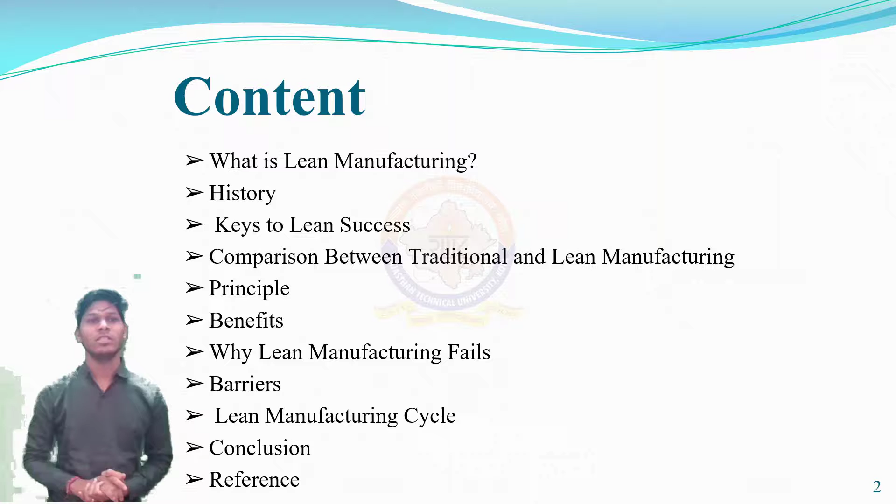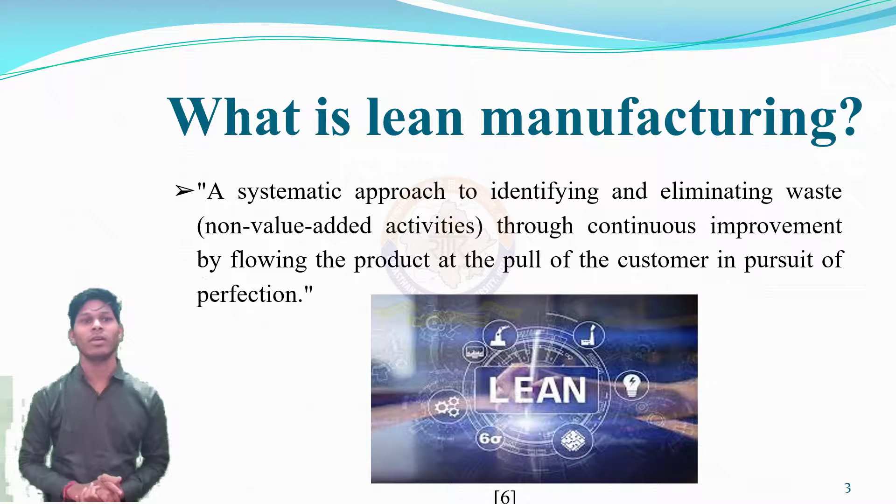Now, what is lean manufacturing? Lean manufacturing is a production process based on an ideology of maximizing productivity while simultaneously minimizing waste within a manufacturing operation. The lean principle sees waste as anything that doesn't add value, a systematic approach to identifying and eliminating waste through continuous improvement by flowing the product at the pull of the customer in pursuit of perfection.

Now we will discuss the history of lean manufacturing. The first person who integrated the concept of lean in the manufacturing system was Henry Ford. Lean was first born in USA. Ford production system was established in 1913.

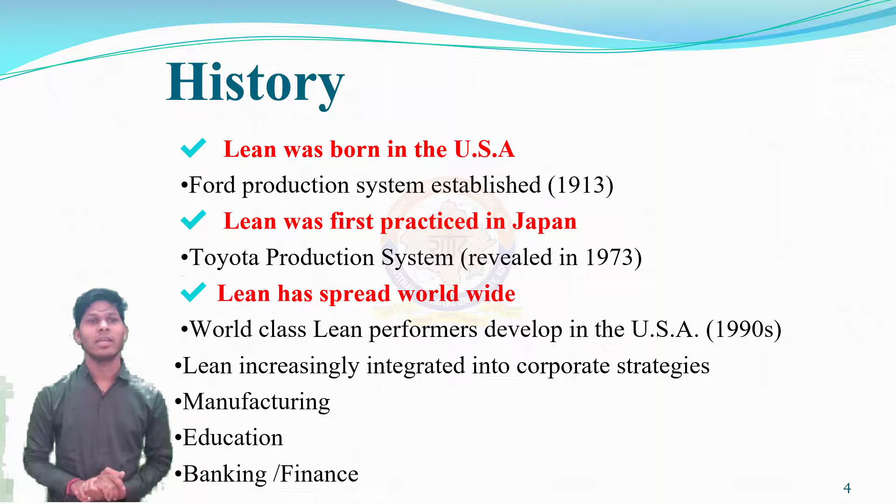When we talk about lean, the first name that strikes our mind is Toyota. Lean was first practiced in Japan. Toyota production system was revealed in 1973. Lean has spread worldwide; world-class lean performers developed in the USA in the 1990s. Lean is increasingly integrated into corporate strategies, manufacturing, education, banking, finance, etc.

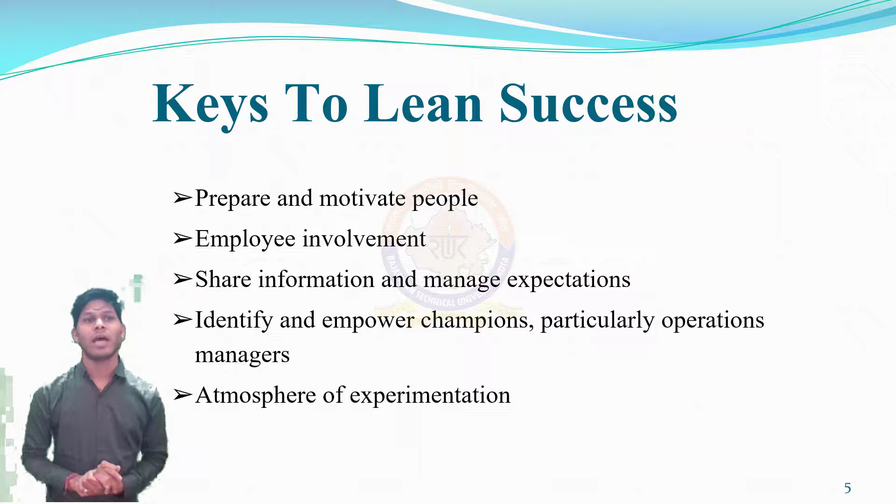Now, next slide is key to lean success. First, prepare and motivate people. Second, employee involvement. Third, share information and manage expectations. Identify and empower champions, particularly operation managers. Atmosphere of experimentation. Now we will discuss comparison between traditional and lean manufacturing.

A key difference in lean manufacturing is that it is based on the concept that production can and should be driven by real customer demand. In traditional production, it is driven by a sales forecast. For years, manufacturers have created products in anticipation of having a market for them. Operations have traditionally been driven by sales forecast and firms tended to stockpile inventories in case they were needed. Lean organizations are capable of producing high quality products economically in lower volumes and bringing them to market faster than mass producers.

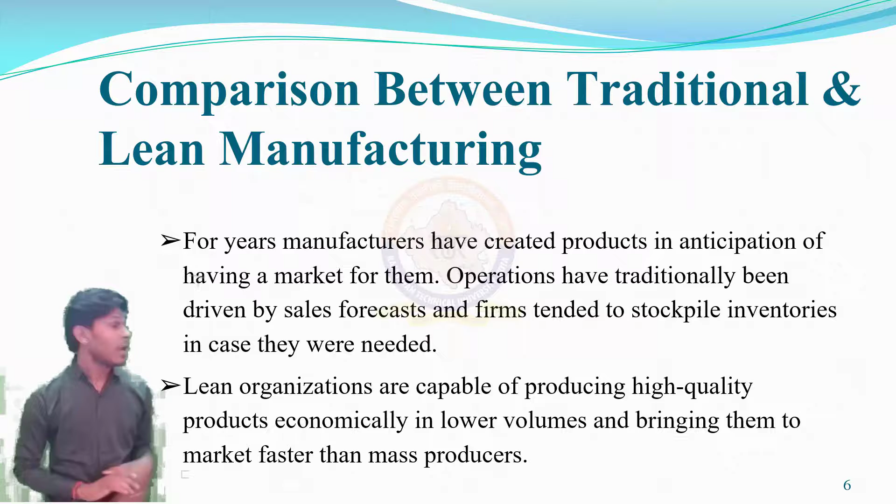Now I talk about principles of lean. Define value, map the value stream, create flow, establish pull, pursue perfection.

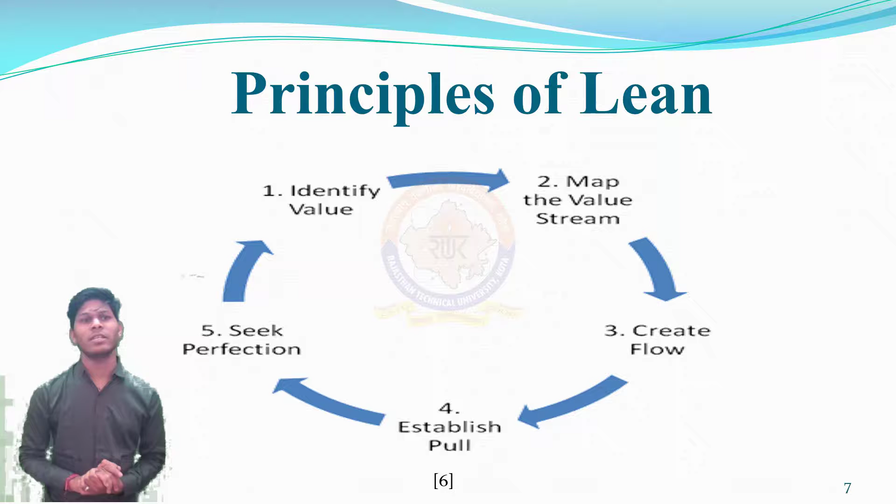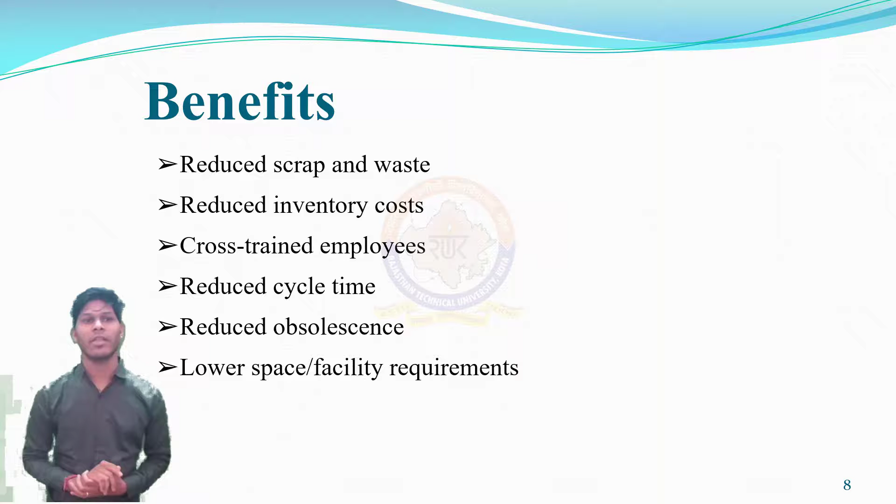Benefits of lean manufacturing: reduce scrap and waste, reduce inventory costs, cross-train employees, reduce cycle time, reduce obsolescence, lower space and facility requirements, high quality and reliability, lower overall costs, self-directed work teams, lead time reduction, fast market response, longer machine life.

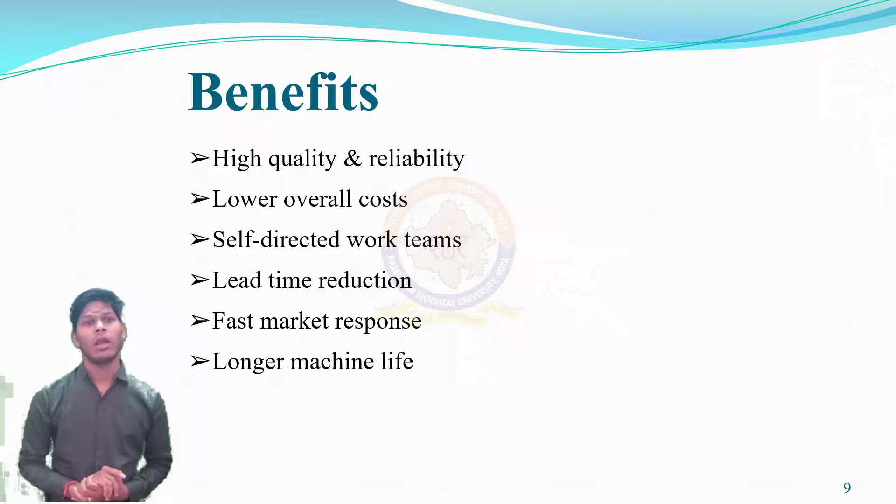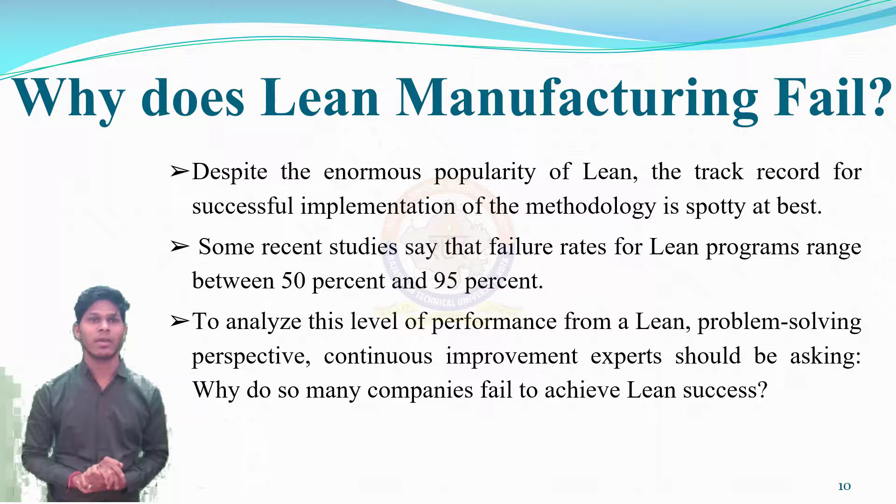Why does lean manufacturing fail? The most common reason why lean fails is because a manufacturer chooses to quit and return to the comforts of past methods rather than persist through hardship and roadblocks. Despite the enormous popularity of lean, the track record for successful implementation of the methodology is spotty at best. Some recent studies say that failure rates for lean programs range between 50% and 95%. To analyze this level of performance from a lean problem-solving perspective, continuous improvement experts should be asking, why do so many companies fail to achieve lean success?

Barriers of lean manufacturing: first, lack of resources. Second, lack of expertise. Initial high cost, which includes the cost of resources as well as expertise. Poor supply chain structure. Ineffective training and development of workforce in the company. Absence of continuous assessment of every individual in the organization. Psychological factors such as fear of losing the job on account of its implementation.

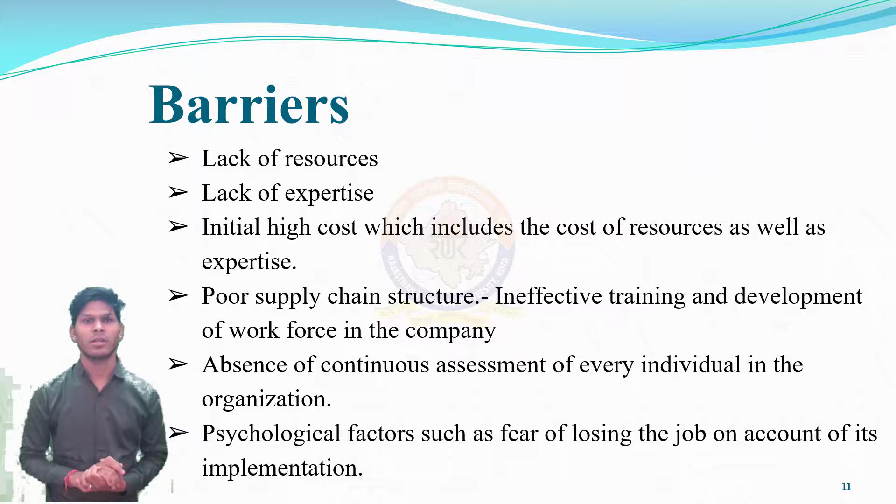Here we talk about 7 wastes of lean manufacturing. First, motion. Motion wastage is any movement made that could have been used for another purpose. Next, inventory - this is the waste that is associated with unprocessed inventory. This includes the waste capital tied up in excess stock, and wasted transport used to move the inventory.

Waiting - this is any form of waiting that must be done by either staff or machinery to complete tasks. Defects - defects refer to a product not meeting the specification expected by the customer.

Overproduction. Overproduction is the most obvious form of manufacturing waste. Not only does it lead to depleted raw material, but also to wasted storage and excess capital tied up in unused products.

Transportation is the process of moving something from one place to another. Transportation itself does not add any value to the customer. Overprocessing - lean manufacturing relies on products delivering value to the customer, but not over-engineering any product. Any work that doesn't need to be done, shouldn't be done.

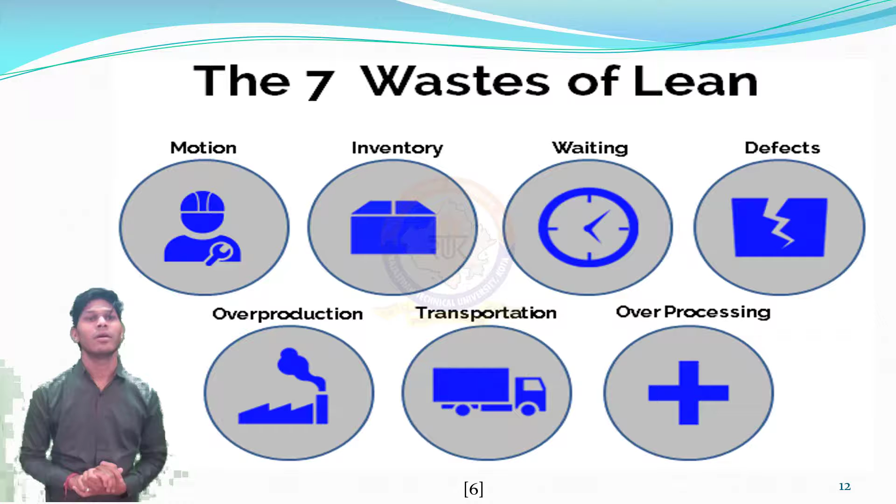Now, the lean manufacturing cycle. This is often held to be the most difficult aspect of lean management. It is typically explained as a 4-step process.

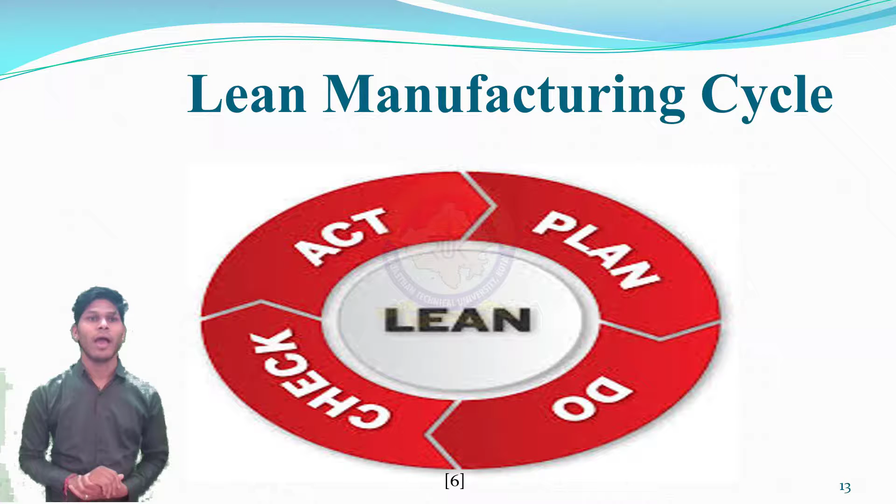First, plan - make a plan for an improvement in a process or the elimination of waste. Do - carry out the plan on a test basis. Check - monitor the result on a quantitative basis if possible; this step is sometimes called study. Act - implement or reject the plan based on the results.

One of the most famous instances in which lean production has been implemented successfully was the luxury car manufacturer Jaguar. Jaguar was faced with the need to compete globally while retaining quality control and driving down costs. By creating a lean production strategy with consultants, the firm streamlined its production process.

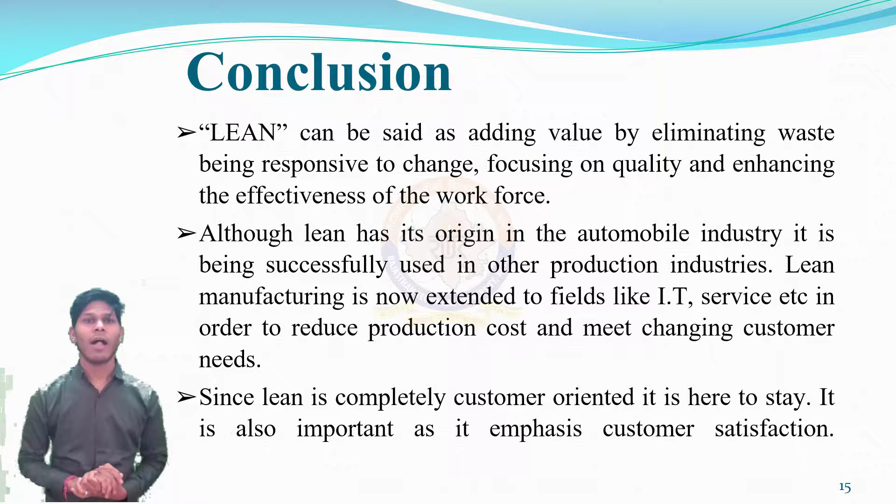Conclusion. As a conclusion to this topic, I would like to say that lean can be said as adding value by eliminating waste, being responsive to change, focusing on quality, and enhancing the effectiveness of workforce. Although lean has its origin in the automobile industry, it is being successfully used in other production industries. Lean manufacturing is now extended to fields like IT services, etc., in order to reduce production cost and meet changing customer needs. Since lean is completely customer oriented, it is here to stay. It is also important as it emphasizes customer satisfaction.